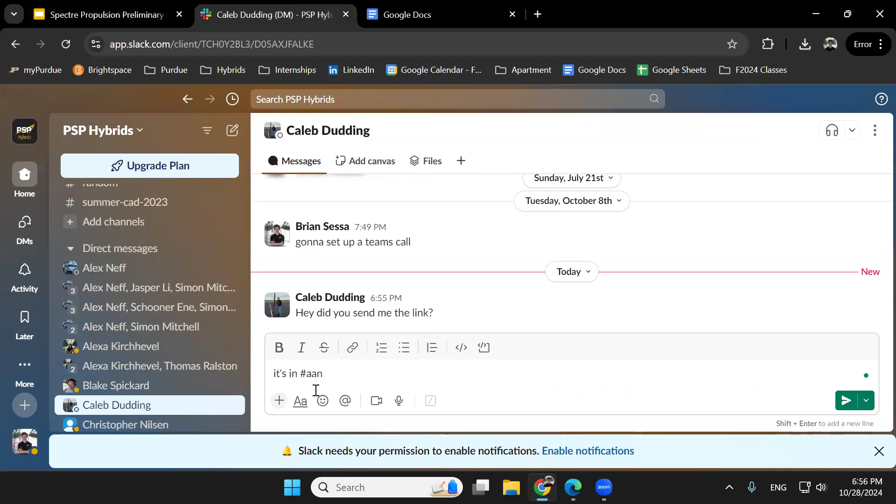At the post office when you mail it, actually go up and give it to them, because when they hand cancel it, it marks it with the date. So it'll be marked that you put it in the mail that day. Even if it's a few days after the election, they know you sent it. At least that's how it works for Alaska. I'm not sure.

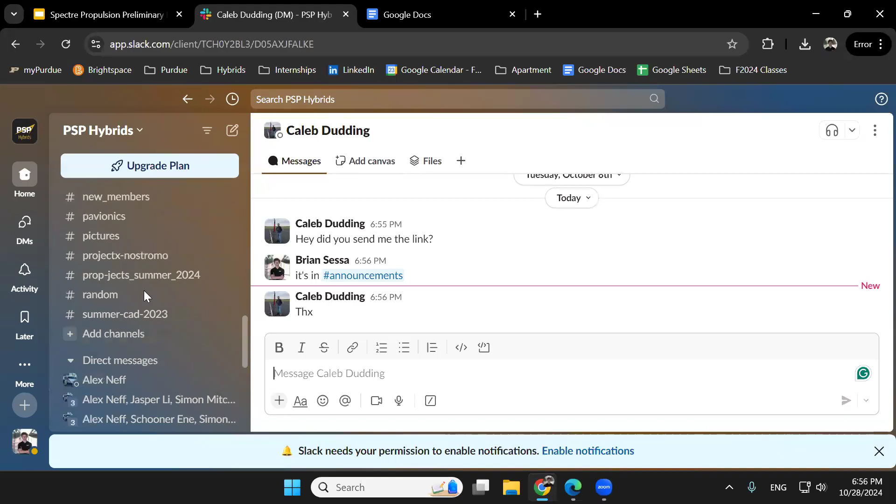Howdy, gents. Oh yes, tomorrow. He confirms your attendance.

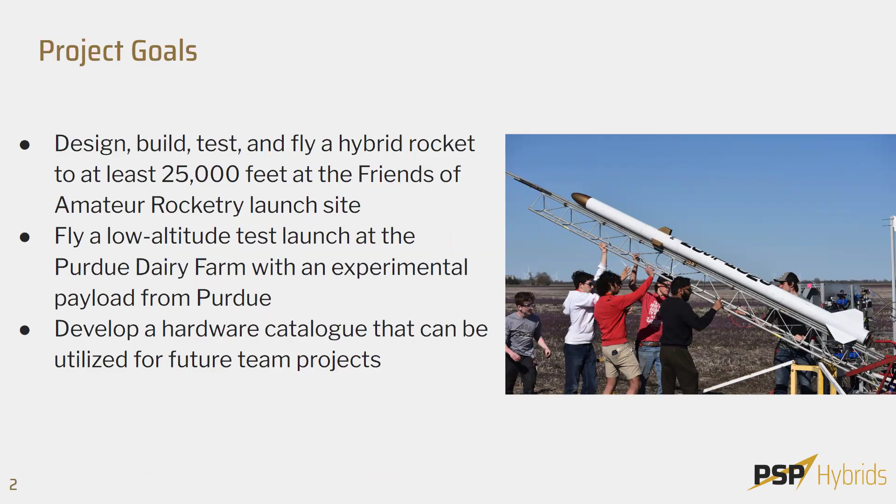So Spectre's project goals entail a rocket that we plan to fly to 25,000 feet at the Friends of Amateur Rocketry launch site. We plan to fly a low altitude test launch at the Purdue Dairy Farm sometime before the FAR launch. We would also like to develop a hardware catalog that we can use for future projects for the team.

Our propulsion system requirements: the engine will bring the rocket to at least 25,000 feet. We are shooting for between a 25,000 and 30,000 foot apogee. The engine will deliver no greater than 9,200 pound-seconds in order to comply with the FAA Class 2 rocket impulse limits. We will have a thrust-to-weight ratio of 10:1 upon takeoff, and the engine and its GSE will be capable of nominal safe operation at Zucrow, Purdue Dairy Farm, and the FAR launch site.

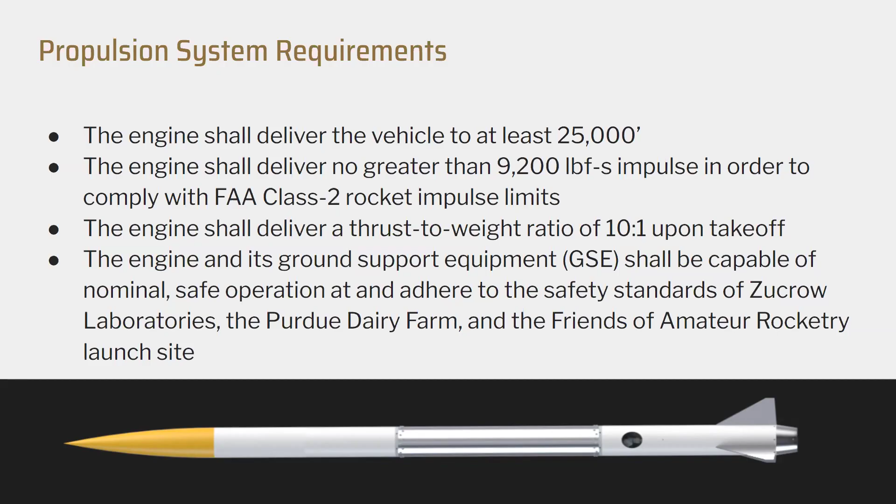Getting into the overview of the rocket: we've developed an O-class blowdown hybrid rocket engine using nitrous oxide and HTPB. We are supercharging our feed system to 1,000 PSI using helium. We estimate a 2,100 pound takeoff thrust with a 550 PSI startup chamber pressure. The rocket has an 8-inch outer diameter with a 6-inch combustion chamber. Any questions about our requirements or system overview?

Shrunk from the last time we talked, right? Total impulse - the total impulse shrunk, yes. So after talking with you, we decided that we wanted to stick below Class 3.

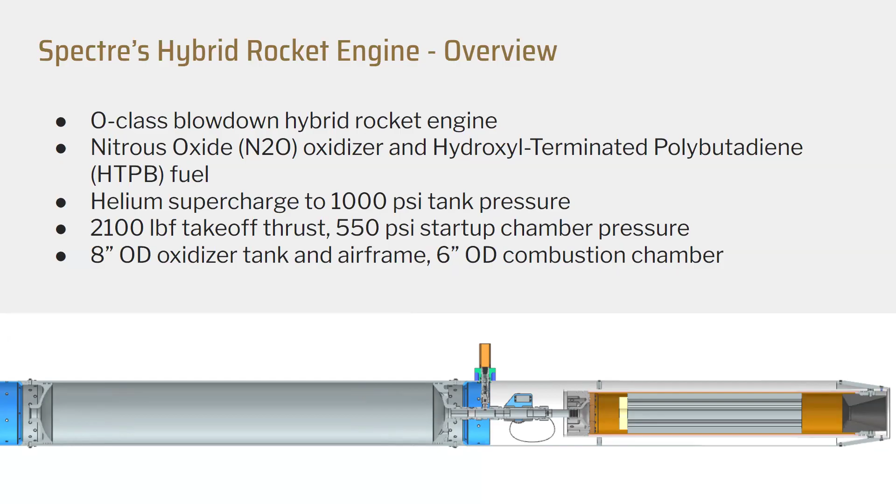Getting into our system simulation, we are predicted to have a 161 pound wet mass and a 116 pound dry mass to an apogee of 25,000 feet. The rocket is about 15 feet long in the current configuration. For the simulation, we have a MATLAB propulsion simulation that we imported the thrust curve into OpenRocket, along with the dry and wet masses. This is how we've run our OpenRocket.

Getting into our propulsion performance simulation. Hey Brian, quick question for you - can you go back to the previous slide? Okay, maybe you'll get to this later.

I might be jumping the gun a bit, but this type of simulation where we're looking at a Mach number of 1.4 goes a little bit beyond what OpenRocket is really built to simulate. I don't know if you've done other flight analysis, but I don't know how these numbers will look in real life, since OpenRocket's documentation notes it really struggles with trajectories that exceed Mach 1. That might be something to look into.

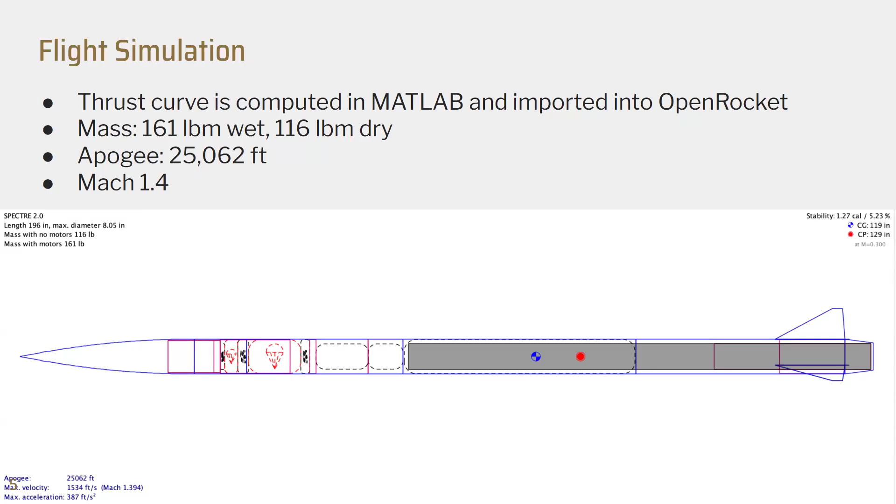Some of our propulsion simulations: we are starting with a takeoff thrust of 2,100 pounds with an average thrust of about 1,850. We're looking at a 4.5-second burn time. Our chamber pressure is an average of 488, and our tank MEOP is 1,000 psi with an average of 805 psi.

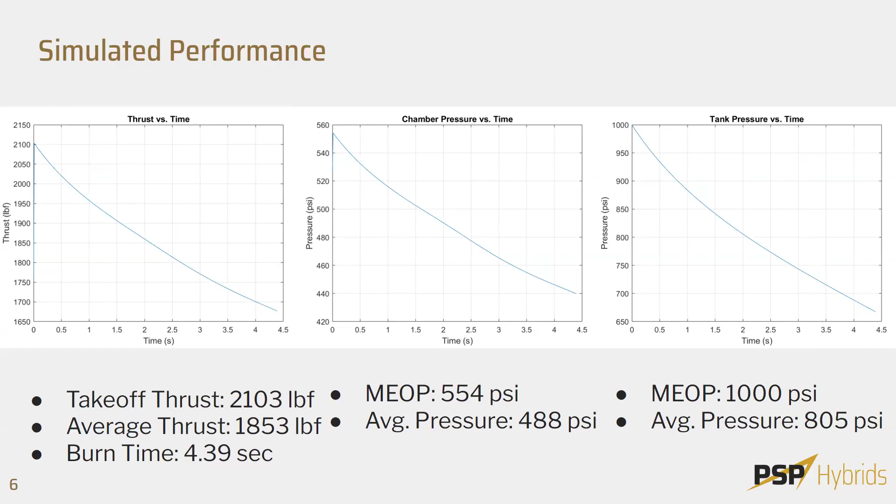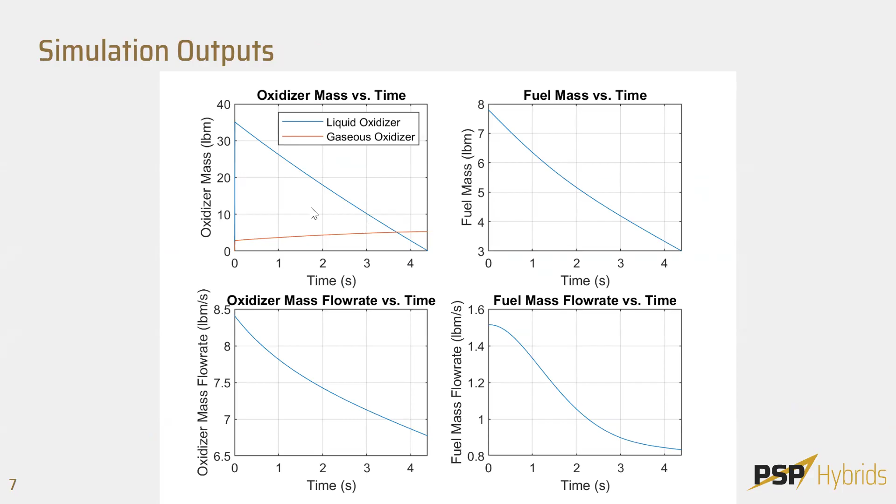We have some other simulation outputs from our propulsion simulation - our mass flow rates. We're starting with an oxidizer mass flow rate of 8.5 pounds per second, and a fuel mass flow rate of about 1.5 pounds per second. We also have other performance features, such as oxidizer-to-fuel ratio versus time and specific impulse versus time. We'll get into later, when we talk about our fuel grain geometry, how we've decided on this OF curve. But if you'd like to look at these as references, they're here in the slideshow, and I can always go back to them.

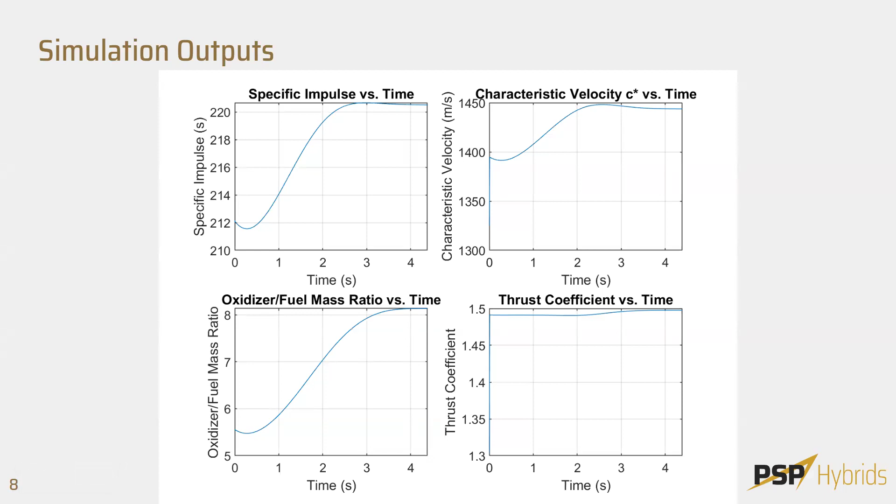Does anyone have questions about the top level assembly before we get into individual components? Okay, great.

I'm Safe, the engineer responsible for the injector. This is our injector. It's a cavitating Venturi style injector, essentially a shower head injector, but the holes are cavitating Venturis. The requirements are that it must be able to choke the flow of oxidizer at a range of operating conditions, and it must achieve an oxidizer mass flow rate of 8.4 pounds per second, which is a propulsion requirement.

You can see some of the specifications here, and on the coming slide we'll show the geometry of the orifices in greater depth.

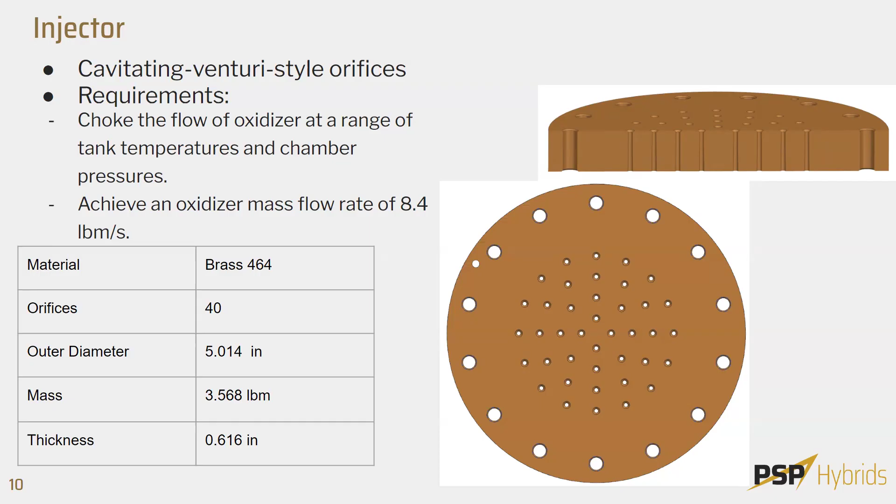This is what each orifice looks like. There are essentially two sections: the inlet and the diffuser. There's also the throat. The idea is that at the throat, the pressure drops to 55% of the nitrous vapor pressure, which we've determined is sufficient to cause cavitation, and in doing so, choke the flow and reduce feed-coupled combustion instabilities. The diffuser half angle seems like an arbitrary number, 0.6 degrees, but that's actually the diffuser half angle of a specific bit we found on McMaster.

So we're going to purchase a tapered drill bit and drill to a specific depth in order to manufacture this. To the right, you can see some CFD we performed to validate the performance. The color variation at the throat is indicative of an area of negative pressure, which is what we'd expect from our sizing. We expect the pressure at the throat to be much lower than the chamber pressure.

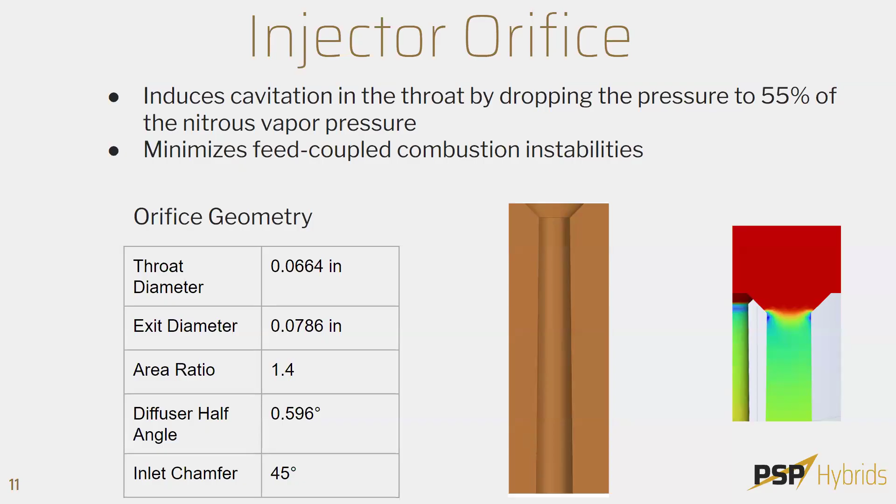This is the forward closure. What this does is lie at the top of the combustion chamber, right below the feed system, and it essentially mounts the injector plate from below. This is a bottom view, and you can sort of see the bolt holes that are going to mount the injector. From above, you can see the inlet that lies directly below the intertank plumbing or the feed system. On the sides, you see these counterbored holes which connect to the combustion chamber, the top part of the combustion chamber.

It also contains O-ring seals. These grooves on the sides seal against the combustion chamber, and you can look at the bottom view as well and see the face seal that seals against the injector plate. There are also two ports for pressure transducers: a pre-injector pressure transducer port, and a combustion chamber pressure transducer port on the side there. You also see a table with specifications.

Have you guys thought about how you're going to tighten your pre-injector pressure port? Yes, so we understand there might be a packaging issue with that port. We would either extend it once we've selected what pressure transducer we're going to use, or put a fitting stack up there. How would you do it without a fitting stack? I don't think you would do it without a fitting stack. If you're going to put a straight thread in there, getting it wrenched down there is going to be pretty cumbersome.

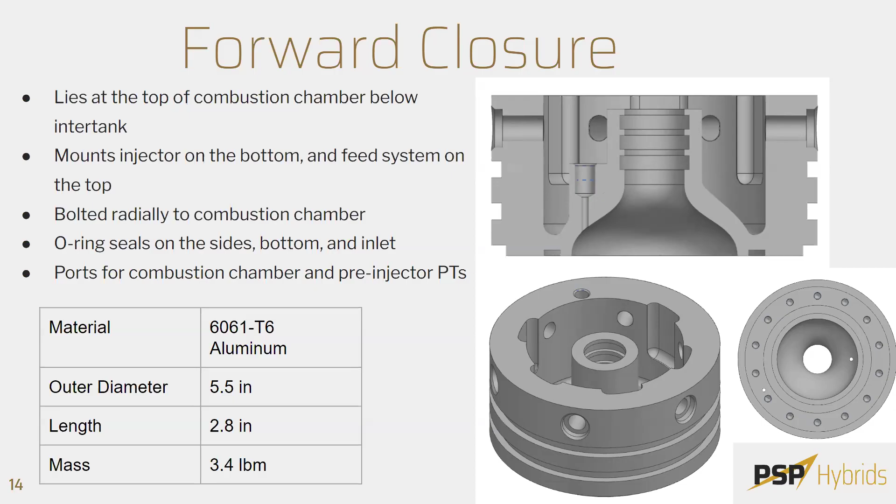So getting into our fuel grain geometry, we are going to be using a 5-petal flower geometry. The purpose of doing this is to boost our fuel mass flow rates towards the beginning of the burn by increasing the internal surface area of the fuel grain. I'll show this on the next slide, but from the analysis we've done, this geometry of fuel grain is going to lower our OF ratio towards the optimum OF for the same length that a cylinder would at a longer length.

The current geometry is 21.3 inches long, and we're predicting to have about 6 millimeters of fuel left after our liquid phase nitrous burn ends. This is to protect the rest of the liner and the wall of the combustion chamber and help with our thermal management.

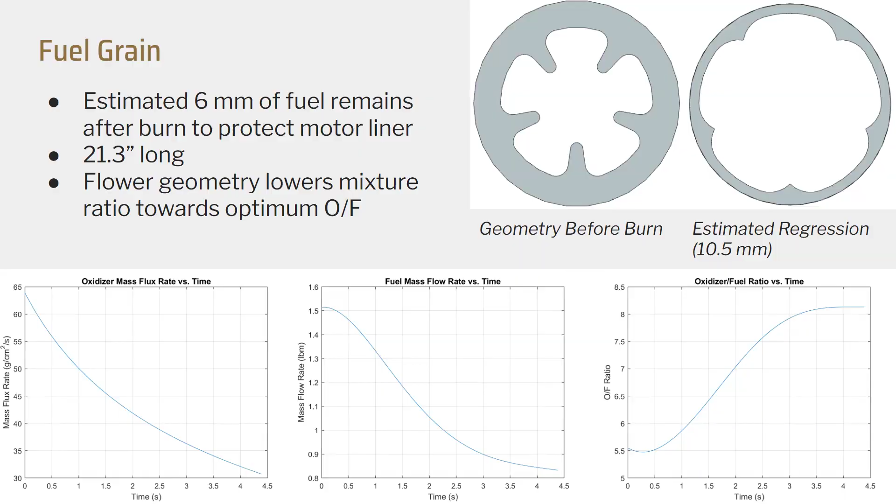This is some of the analysis that I mentioned going into the port geometry comparisons. So these are two fuel grains with the same port area and the same length, but one of them is a cylinder fuel grain and the other is the flower fuel grain I showed on the last slide. Here you can see our average OF ratio for the cylindrical fuel grain is a lot higher than the average OF of the flower grain. So we have chosen the flower grain in order to sink our OF ratios towards the beginning of the burn and have the average sit closer to our optimum mixture ratio.

Do you have a calculation of your port? No, I don't have one for the port Mach number. Port velocity? No, I don't. I will make note of that.

How have you vetted this geometry against prior art? Your own prior art or others? So Hybrid's past two vehicles, Havoc used a cylindrical paraffin grain, and Nostromo used a star grain similar to the flower grain similar to this one. The flower grain saw decent performance compared to the cylindrical grain. It was hard to do because of the limited hot fire testing we did on Nostromo, so it was hard to directly compare how the geometry was affecting the mixture ratios. But we saw pretty stable burning in both the flower and the cylindrical ports.

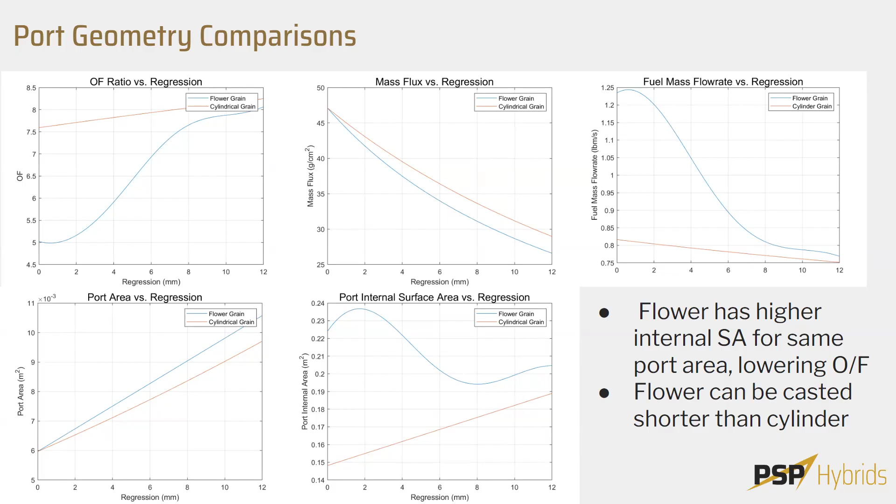Okay, we're going to hop into fuel grain casting, Schooner.

HTPB-45M is what we currently have stocked, and it's one of the higher density HTPB variations.

We went with MDI due to its characterization to cure at room temperature, so it doesn't require an oven to bake. For the fuel to curative ratio, we did calculations based on the effective weight of the OH molecules to the NCO molecules in the curative.

We came up with a 4.9 ratio of fuel to curative. We also decided to add a little bit of additives so we don't have radiative heat transfer from the burning surface to the internal parts of the grain, so we don't have melting before the flame actually reaches the HTPB.

For actual casting, we used a standard single long grain with a casting rod, with end caps on each end to keep the casting rod concentric in the liner. To ensure there's no adhesion to the core rod, we're going to wrap it with plastic wrap, which has been shown in solid fuels that also use HTPB as a binder to reduce adhesion. It's also made out of PVA, so in case we're unable to remove it, it's water soluble.

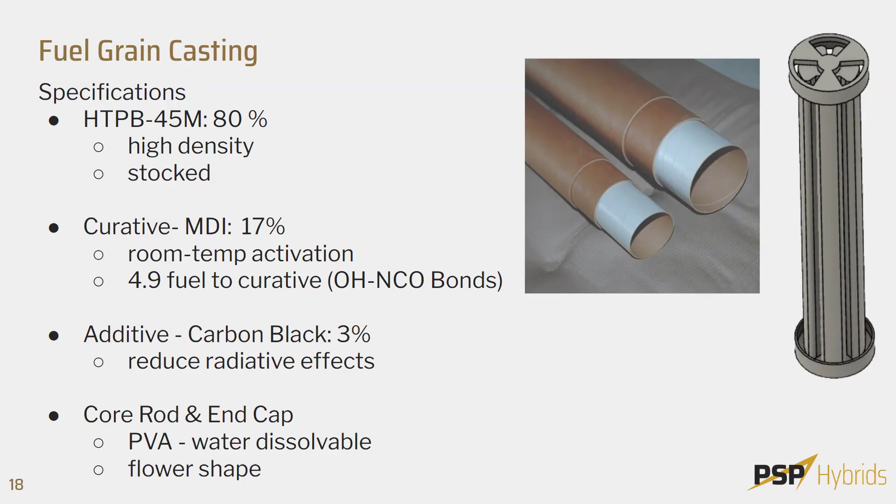I think that's it. Miles.

Are you going to try to use force to push it out, or are you just gonna use water? I think we're gonna use water, and then the plastic wrap would be for if there's anything that's not coming out or not dissolving, then it would be able to slip through the plastic wrap and be removed that way.

So are you gonna discard the cardboard tube? No, it'll be cast into the cardboard tube and it'll sit in the combustion chamber. Right, so how do you protect the cardboard tube when you're using all this water to get the mandrel out? It's a good question.

Yeah, so Brian, when we did this, the phenolic itself protected the liner because phenolic's pretty waterproof. Your normal cardboard won't have that effect, it'll dissolve. Right, so yeah, we'll have to reconsider that then.

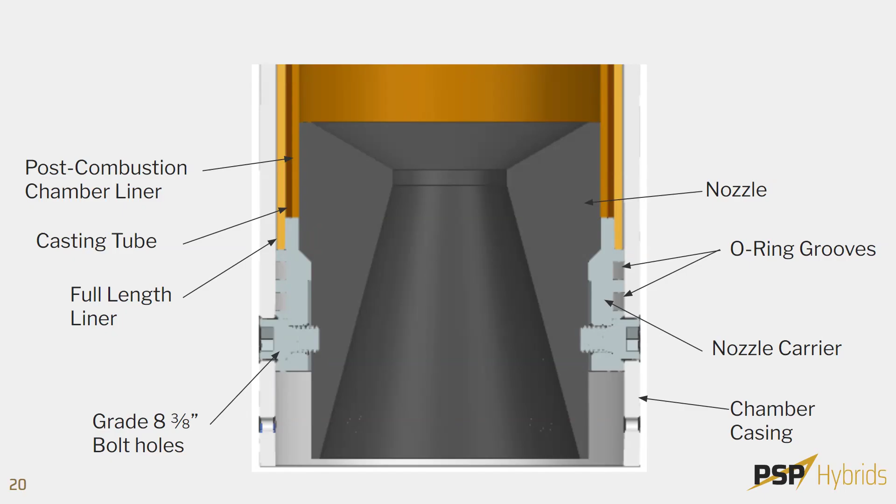It also sits on top of, I'll pull this up for clarity, the nestled phenolic piece, but that's going to be right in the hottest region in your nozzle. Right, but yeah, you are right, if that casting tube gets compromised, then you're going to risk the stability of the fuel grain inside the combustion chamber.

It would be better to cast your fuel grain directly into the primary phenolic and then nest those other pieces up into it somehow afterward. Right, I think that's what we will do. We could just make the casting tube not full length, just the same length as the post and pre sections, and cast the fuel grain to a larger diameter. Appreciate the comment, so you'll use the cardboard just in the post and pre. Yeah, we can do that, that makes sense.

Jim, did you have a question? Okay, cool.

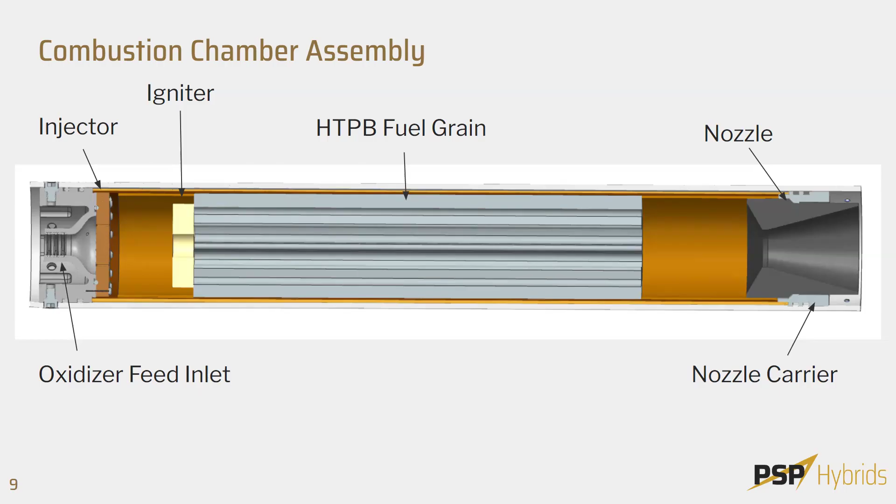Could you go to that slide? That slide is perfect right there. Okay, correct me if I'm wrong, but I believe there's a leak path between the graphite nozzle and then through the 3/8 inch bolt, right?

Oh, sure, you know what I mean. Can you see my mouse? Yeah, okay. So we plan to have RTV silicone here in the carrier and on the liner. This is to act as the sealant. So if this region where my mouse is doesn't act as a leak path, then this shouldn't either, is the idea. I got you.

Why are you gluing it to the phenolic? You're going to glue the nozzle to the phenolic? Or sorry, the RTV will be on the carrier, not the phenolic. Okay, the carrier assembly. Are you worried about pressurizing the phenolic, Caleb?

Just the phenolics, it's card. I'm worried it'll flex and the RTV won't hold up to that. And then you would also make your assembly non-disassemblable, and you would create a unified assembly of the two, which you really don't want for practicality's sake.

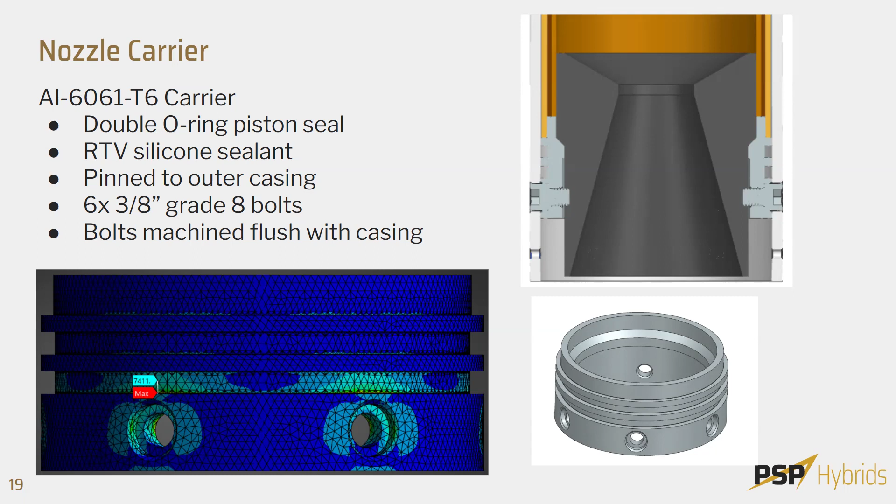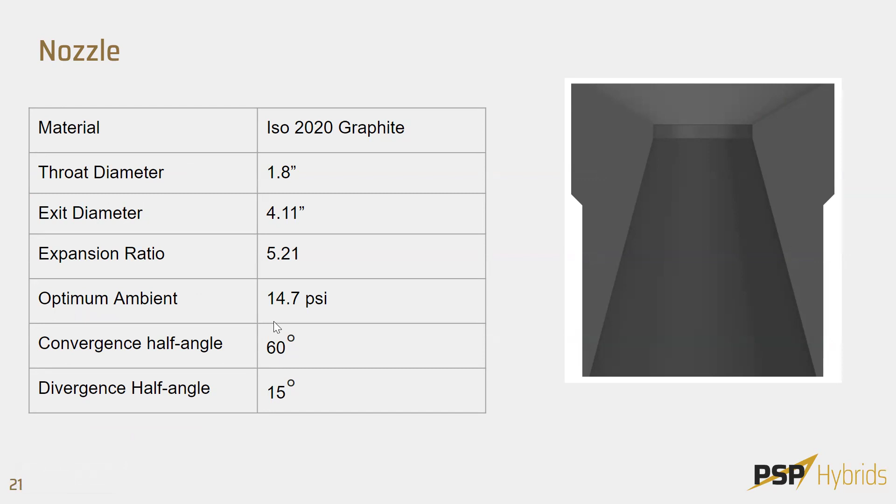And yeah, there's the assembly, and an overview of our nozzle. We're making the nozzle out of ISO 2020 graphite, machined by Caleb. Thank you, Caleb. We're sitting at a 5.21 expansion ratio with an optimized ambient pressure of 14.7 psi, so we're going to be operating perfectly expanded upon launch. So we're going to go into our igniter if there's no more questions about the nozzle or the nozzle carrier assembly.

All right, hello everybody. My name is Simon. I'm one of the co-leads for the propulsion team, and I'll be presenting the igniter. So the igniter consists of two parts.

We have a solid propellant core, and then a paraffin wax outer ring around that that'll bridge between the solid core and the inner diameter of the phenolic in the combustion chamber. We'll also add a little bit of magnesium shavings into that paraffin wax outer ring just for additional thermal energy for the ignition. We'll use an E-match pyrogen to actually trigger the igniter.

Our plan for that solid propellant core is to use the Purdue propellant formulation, casting in coordination with the Spaceport PSP team. If that falls through, we're also looking into partnering with somebody who has an L3 rocketry license, and we will consider using a commercial grain as well for that.

This is essentially the same design that was used in the past on the team for the Nostromo launch, scaled up slightly to accommodate the larger motor size. It has around 1.5 times the solid propellant mass as the Nostromo igniter did.

Which rocket was the Nostromo? It's the senior design rocket. Okay, it tested last spring. Yes, that flew in April. We started testing the spring, like January, February, and launched in April. Okay. And we saw great success with the igniter, and so we don't see a reason to use an alternative.

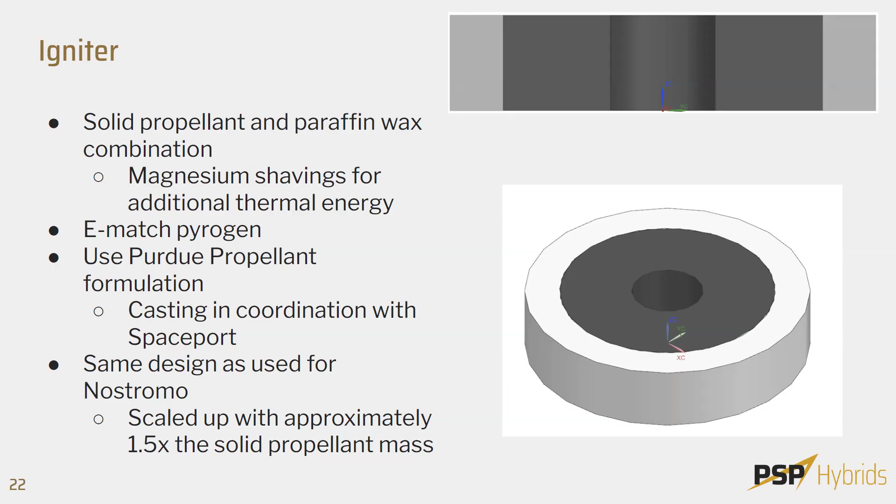I'll now discuss the flight tank that we're planning to use. You can see some of our top level parameters there. We're looking at around 2,100 cubic inches of volume. We have a maximum allowable working pressure of 1,200 psi, planning to hydrostatic to 1.5, which is 1,800 psi. The system was built with a safety factor of 2.0, which brings us in line with the Spaceport America Cup design guidelines. The entire system will be constructed out of aluminum.

It has an 8-inch OD. Primary wall thickness along the length of it is 1/4 inch. It's around 55 inches long and weighs a little over 40 pounds. We're planning to have a 1-inch SAE ORB port on each of the head caps, and then on the aft head cap, we'll also have 2 auxiliary 1/4 inch SAE ORB ports that we're planning to use for instrumentation.

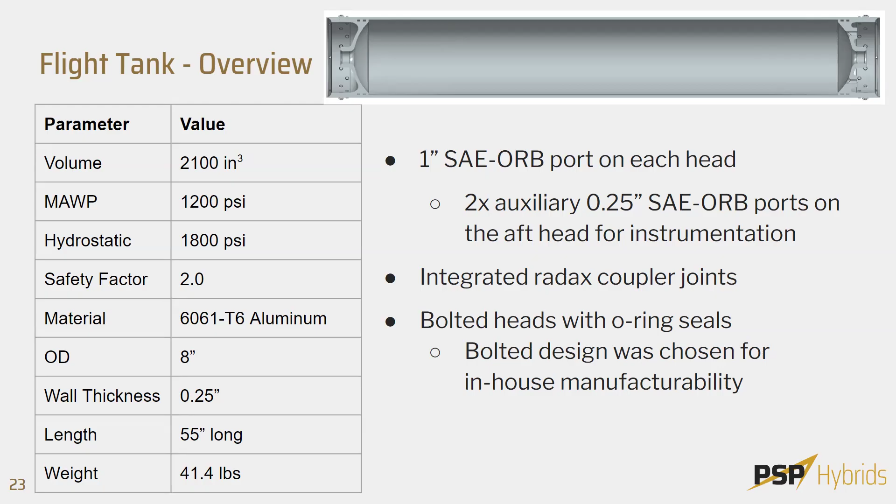Primarily, we'll add a thermocouple there to make sure that we're getting temperature of the liquid phase of the nitrous oxide. Also integrated into the head caps are Radax coupler joints, which we'll discuss a little bit later on in the presentation. And then the head caps will be secured with a bolted closure, and then we have O-rings for the seal. We'll discuss a little bit more of that in detail.

The factor of safety of 2, is that on yield or ultimate? That is on yield. And I'll discuss where that is derived as well.

Here's the design of the tank head itself. It's bolted with an O-ring seal. We're planning to use 2 redundant -365 90A durometer nitrile O-rings, and we'll run contoured backup rings on those for a little bit of extra support.

We're going to use 3/8-24 button head screws, arranged in 2 rows of 10. The actual head geometry is torispherical. Our goal with this geometry was to minimize weight and length, to reduce the amount of stock required to machine it from.

FEA analysis shows a safety factor of 2.09 on the head with the auxiliary ports. On the head without ports, the forward head, it's a little higher. The structural analysis for the bolts and wall stresses are seen here. Our primary failure mode will be tear out of the bolts on the head caps. You can also see the stresses in the primary wall of the tube, the lowest being our hoop stress at 2.15 factor of safety.

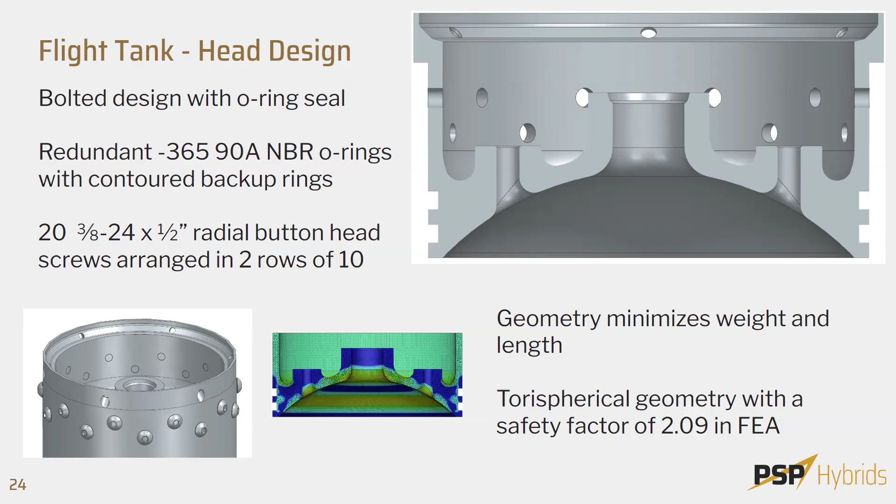What are the angled holes for? Is that an airframe thing? That is for the coupler design, which we'll discuss in detail later on. Okay, so it couples to the airframe.

And then the forward tank instrumentation manifold, you'll start us off with that. So the design requirements for the forward tank instrument manifold were to withstand the pressures of the flight tank, as well as allow 2 relief valves and 2 pieces of instrumentation access to the pressure within the tank during flight and during filling. So we decided to go with a hexagonal shape to fit within the 8-inch diameter profile, while also allowing our valves and instruments to be offset by 120 degrees to make it easier to wrench these parts in during assembly.

The actual ports for the instruments and the relief valves are 1/4-inch NPT holes. They're on the side and on the top. The top hole is basically for the thermocouple to go directly into the tank and measure the temperature of the ullage of the nitrous oxide. The bottom port is an SAE ORB to match the same port as that on the upper forward closure of the tank. The failure mode for this piece of hardware is the tear of the threads on the actual ports.

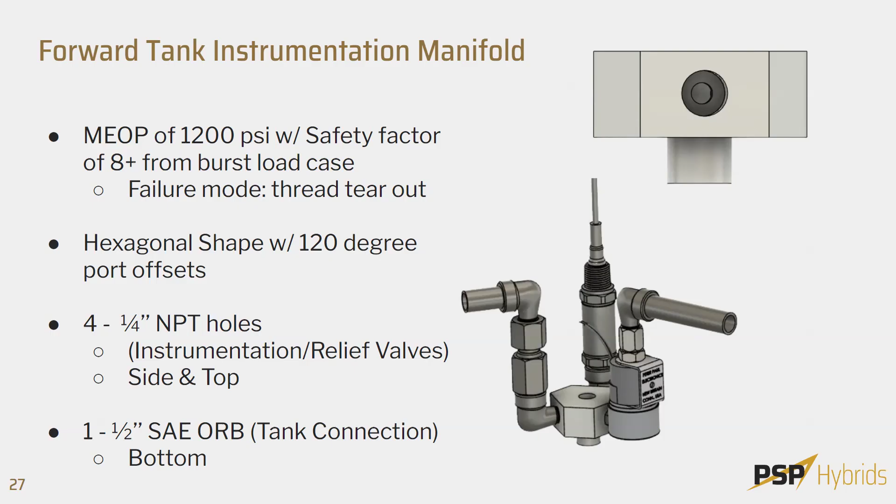It's also always interesting to screw stainless steel NPT fittings into aluminum. Right, you get to do that once. That was one reason we decided to create a separate manifold rather than multi-porting our nox tank head, because if we ruin that part, it's gonna be a lot cheaper to replace. But yeah, ideally we'll have to just practice on that.

Well, if you do, you can always use straight thread O-ring fittings, that elbow. You can make and break those as many times as you want. It's the NPT with the tapered threads that you're essentially gonna be machining your aluminum with the stainless fitting every time.

Yeah, any other questions? Okay.

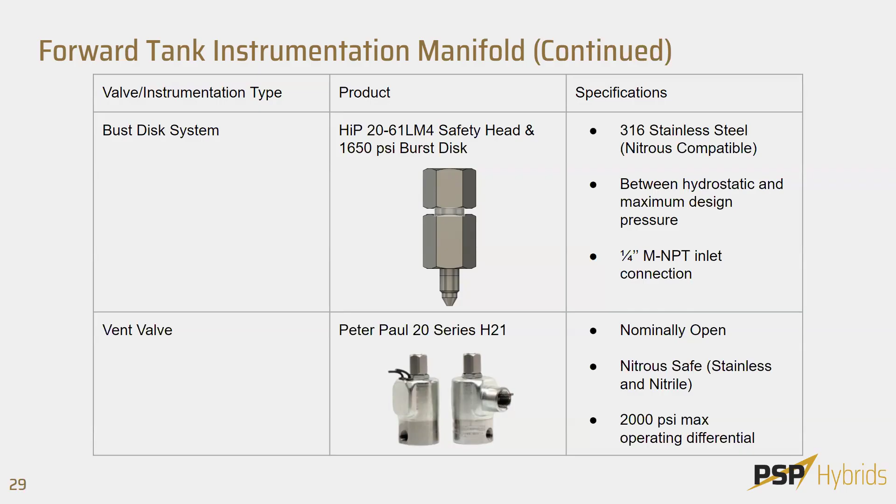It's been developed so that we have full control with the GSE before the launch occurs, so there will be no delay in controlling the vent valve. Only when the electrical disconnect on the rocket actuates will there be an adjustable variable resistor time delay that keeps the vent valve powered for a set period before it shuts off and the vent valve opens again, so there will be no situation in which the vent valve is stuck closed. To provide power to the vent valve during that short period, we'll have 3 14500 commercial lithium ion batteries. We estimate those will weigh about a quarter pound, so not a very significant weight.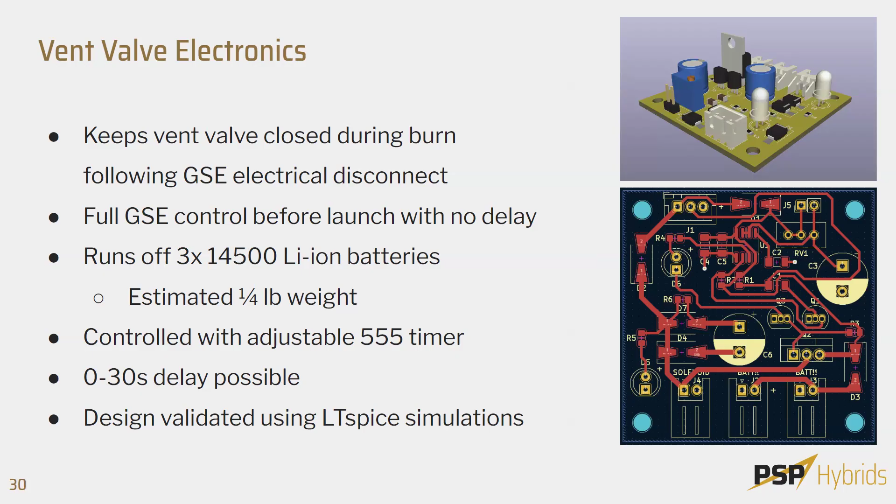Hello everyone, my name is Alex. I'm the propulsion co-lead along with Simon and responsible for the intertank. So just some general things about the intertank.

As you can see here, we're including a hatch in the lower airframe piece in order to read the valve state while testing our run valve. For our fitting stack-up, we're mainly going to be using anodized aluminum fittings from a source we have online, to reduce weight and things like that.

So we're going to start off with the run valve team. Do you guys want to come up? Yep.

Hi, I'm Theo. And I'm Kiwano. We are two of the members on the Run Valve Team new member project.

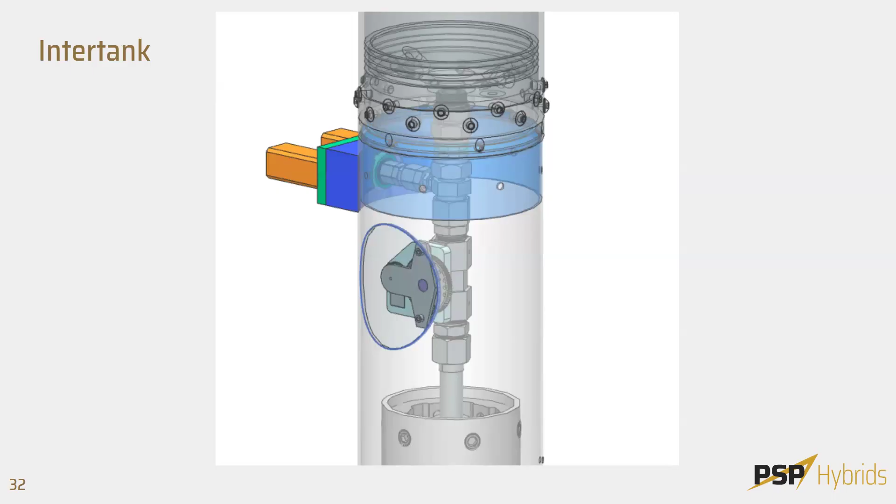We were tasked to design a mechanically actuated onboard run valve. It needs to actuate in 300 milliseconds or less to fully open the valve in time. The valve needs to open 90 degrees, and we're using a 2-to-1 gear ratio, so our servo needs to actuate 180 degrees in 300 milliseconds.

We were planning on using a magnetic disconnect, but we are now discussing maybe using a mechanical disconnect instead. We're still figuring that out. They used a mechanical disconnect last year, which would probably work for our needs, but we need to do some more research on a better solution.

Looking at servos online, we ran into an issue trying to get enough torque but also enough speed on our motor. We found a motor that meets our torque needs and is relatively close to our speed needs, so we're going to purchase it, do some testing, and attempt to overvolt it to get faster actuation times.

There's some concern, though, depending on whether the motor has a built-in microcontroller, because that can be damaged by overvolting. We're not sure based on the listings online, so we need to do some more looking once we actually get the part in our hands.

About the ball valve, we found one online from a manufacturer called Durachoice. It's made out of stainless steel, 2000 psi rated, nitrous compatible PTFE, and is 0.98 inches in diameter.

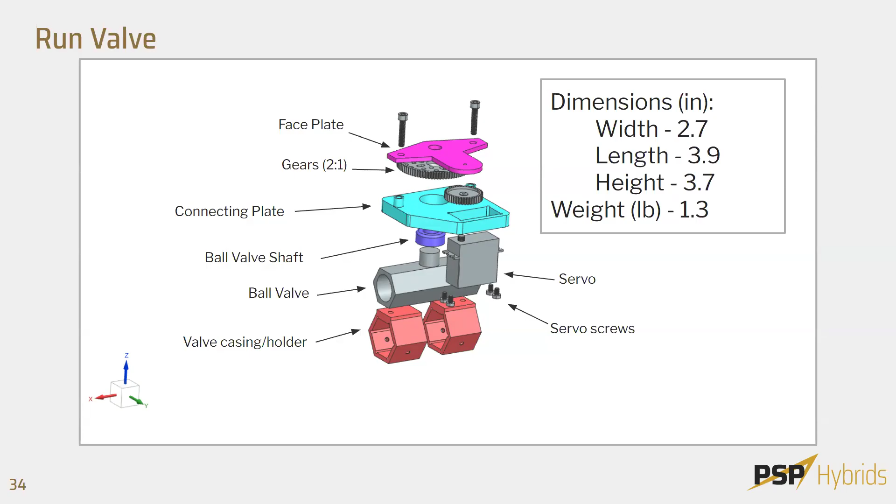We plan on making our ID, we're aiming for 1-inch throughout the intertank. So I think it's a 1-inch nominal, but it's got 0.98 inch ID. It's got 1-inch NPTs on the side of it. A 1-inch valve will have like a 1.3 inch OD, 1-inch tubing is like 1.3 inch OD.

This may be a half-inch valve. From the chart on their data sheet, it listed like a nominal value and then an ID for it. It said 1 inch and 0.98 inch. I may be misremembering, but we'll definitely look into it and make sure. Do you have CAD for it? No, we do not have the exact CAD, they emailed the vendor. So is the ID the ball ID or the connection size? I'm pretty sure it's the ball ID.

So it would be good to put on here what is it, a 1 inch NPT valve, a 3/4 inch NPT valve, etc. And then the valves are typically characterized by whether it's a standard port or a full port.

Are there ball valves out there with more friendly external geometry? I'm not sure. We did a lot of research, but I think this was the best and most affordable we could find. The problem we're running into is that all the ball valves that had a good shape to be paired with a motor already had a motor attached to them that was much more expensive, so we were trying to save some money by designing our own system. Is high pressure systems selling ones that are NPT fittings? Not sure. I know you can just buy the high pressure systems ball valves without the massive pneumatic actuator attachment, and those are pretty friendly to mount too. But they're gonna weigh 5 times what a low pressure valve weighs.

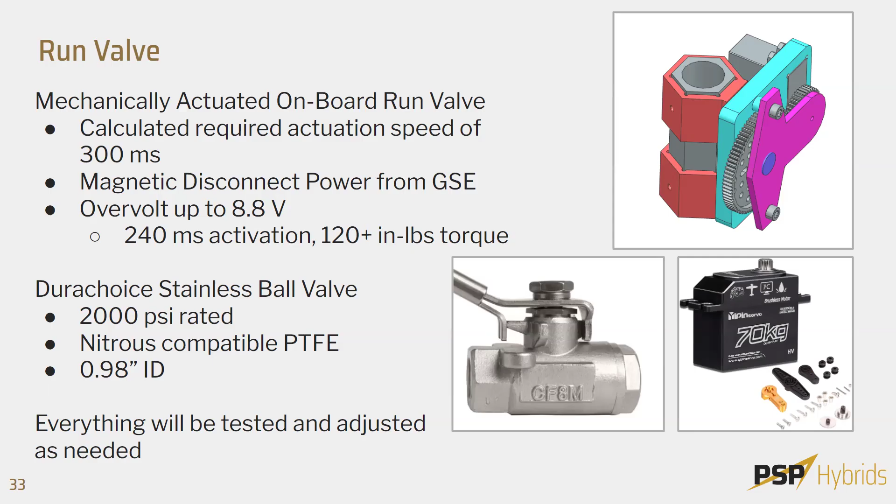So next thing we're gonna talk about is the quick disconnect. This is connected at a T just above the run line, just below the aux tank. It is a design that's been proven before at a smaller scale on Stromo. We currently own the 1/4 inch helium rated run line hose that will go into it. And it works basically just by using a McMaster stainless steel high pressure quick disconnect coupling and pulling that back while pushing itself off the rocket. It'll most likely be connected to the test stand / launch rail by some sort of system that will make it so it doesn't hit the ground. And those 2 orange actuators you see, we also currently own our 60mm stroke pneumatic cylinders.

So the QD will have integral check valves? Yes, it is, check valve inside of it.

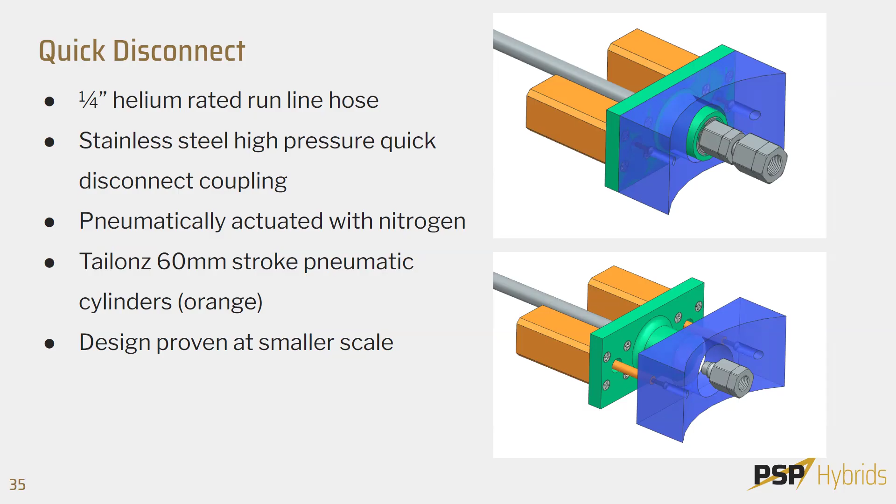Okay, that makes sense, so make it like a little gap there. Air gap it, yeah. Cool.

As opposed to that very proven system, this is more of a novel system. This is our feed system interface, so this is what connects below the run valve into the top of the upper closure, the forward closure of the combustion chamber. You can see here, it's kind of a narrow view, but there's a wider view.

The next slide shows the requirements for this, which were to unconstrain the intertank length from the length between the holes in the lower airframe. That's a little confusing to imagine, but all of our thrust is guided through the lower airframe piece that's connected at the lower part to the combustion chamber and at its upper part to the bottom of the aux tank.

So that length basically constrains the length of the intertank very specifically, and it's unknown to a very high precision what that length is going to be. So we need to be able to, during assembly, have a somewhat adjustable system. We don't predict it'll have to adjust very much, but it does need to. So we decided on the system of a rod seal with this

1-inch OD, 0.049 wall stainless steel pipe that's flared into an AN fitting that fits into our upper closure or forward closure. There in black, you can see our X-profile O-rings, and the white are backing rings for those O-rings to ensure the seal is good.

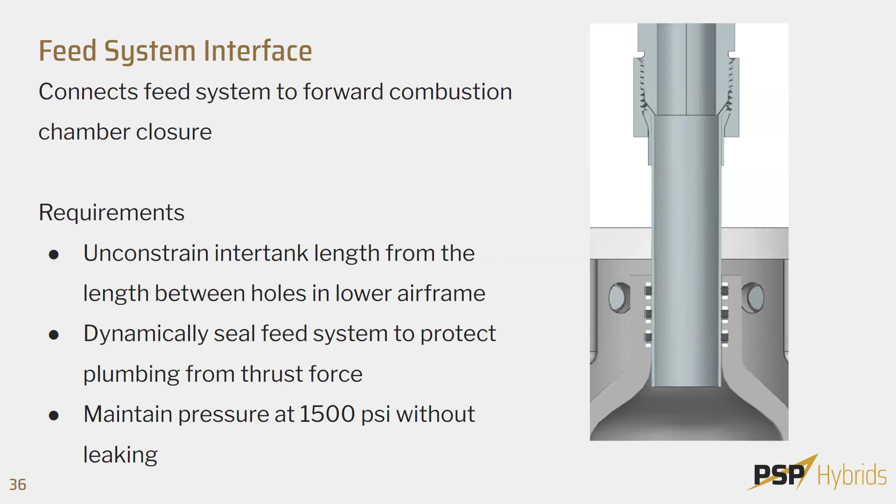Here's a wider view, and also a view of our demonstrator piece. Because this is a novel idea, we wanted to make sure it worked, so we hydrostatic tested a piece similar enough to prove the design. We hydrostatic tested this piece to 1500 psi at Zucrow, and it passed with flying colors on the leak down test.

You can see it a bit more here. The main difference between the two setups is that this demonstrator is aluminum, while the actual one will be stainless steel, but we don't believe the surface finish will be significantly different enough to challenge the O-ring seals.

The main reason we chose X-profile O-rings instead of classic O-rings is that they have better characteristics for sealing dynamic interfaces meant to slide during install and uninstall, since they have two points of contact. They're also less susceptible to spiral failure when taking them in and out, and they can accommodate a bit of Krytox lubricant in the gap between the two X's. That's why we decided on those for the dynamic seal.

Any questions on this system or the test piece?

I hate it, but it's kind of clever. We'll take that.

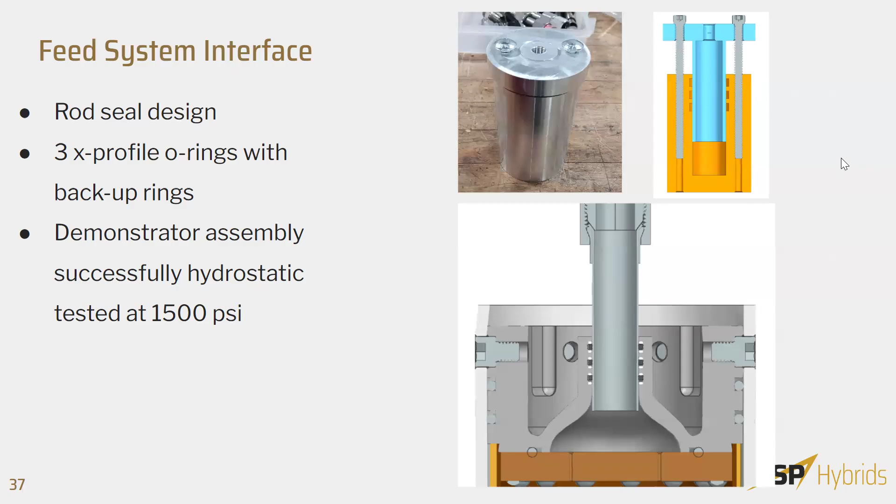And in the rocket, what keeps these parts together? Do you mind? How do I show a hidden slide? You have to escape. I have a hidden slide in case we had questions about this. How do I do slideshow?

Basically, the lower airframe piece, the gray on the outside, connects to that blue coupler on top. The orange is our constrained length, and that constrains the blue length very specifically. So what's keeping it from coming apart is the connection between the airframe and aux tank, and the airframe and combustion chamber.

So this connection and this connection, it's the stack up of fittings in the valve itself, screwed into the aux tank. If you take the airframe away, the motor will just fall on the ground. It's not constrained to the fittings, so you're relying on the airframe, but the airframe is sized to handle the parachute deployment forces, those shock forces, so it should be more than enough to handle the pressure forces that this one faces. We can calculate that force and make sure of that in our further analysis.

I don't think there's any calculating parachute deployment forces, but a lot is the answer. Okay, just make sure your airframe is good because you're relying on it. Yep.

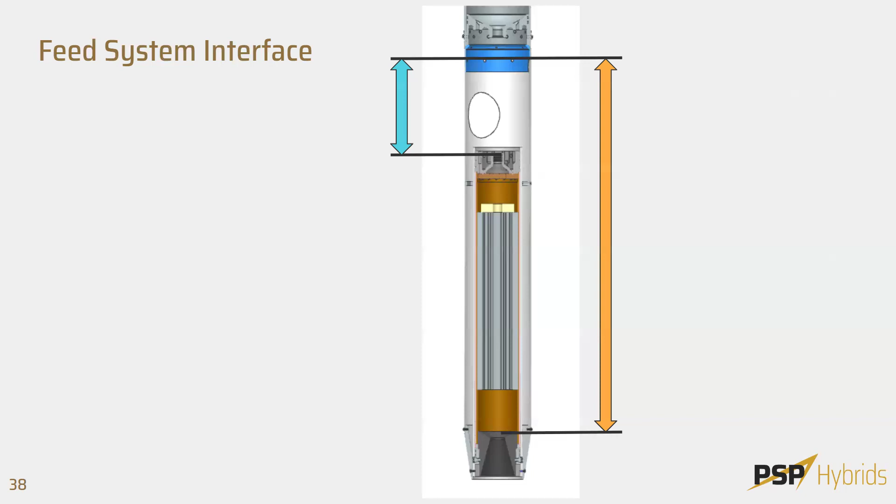Moving on, just a little bit on electrical disconnects. It's something we've been thinking about because it's flight hardware, so it's more in the distance than the hot fire test stuff. We selected USB 3.0 connectors because Nostromo used USB-Cs, and USB-Cs are not polarized, so it was possible to plug them in backwards, which would reverse the power and possibly fry components.

So they're pretty well, pretty strongly connected, but not too strong. We think the force of launch won't be able to disconnect them. We could theoretically manufacture little 3D printed pieces that glue onto the side of the airframe with a square hole at the end, and we can play with that angle. Right now I think it's 45 degrees, just to make sure it tears out cleanly. So, any questions about this?

USB 3 is basically just like a USB-A connector, a regular USB with the blue strip, that's the 3.0. It has more conductors to support faster transfer speeds. So using USB 3.0 type A connectors over 2.0 type A connectors gives us additional conductors for instrumentation valves. I'm trying to find a reason to hate this, but I think it's actually really clever.

We'll take it, good luck. Thank you, I hope it's plugged in better than my USB port in my car. Yeah, we may have to decide to buy them from a good manufacturer that makes a snug connection. Hey Simon, if you're gonna use pre-made cables before you get to installing them, cut them first to make sure they're not some weird wire that's impossible to solder to.

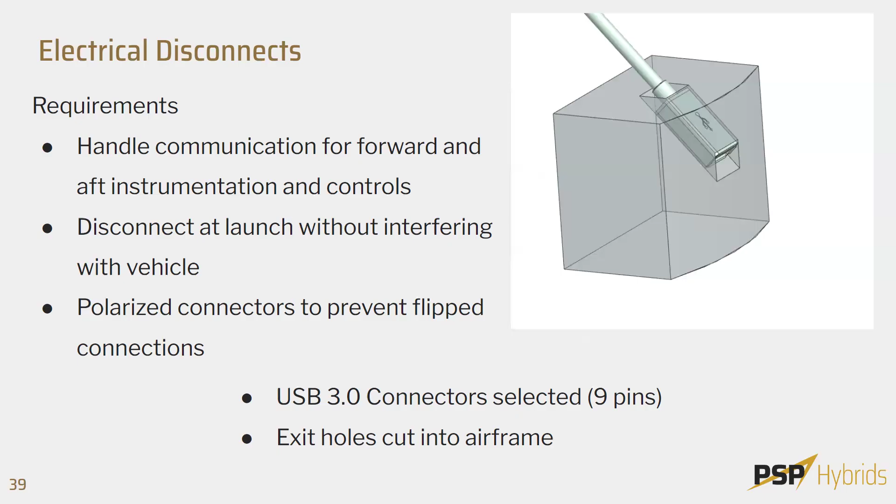Cool, all right, next we're going to get into the airframe integration. Hugo.

Hi, I'm Hugo, the manufacturing specialist and also the engineer responsible for the coupler design that will join the oxidizer tank to the upper and lower airframe. It's a Radax joint design with 45-degree angle bolts relative to the vertical. They're usually 30, we went with 45 mainly because of packing issues, so the bolts stick out less. Designed to work at 5,000 psi, 5,000 pound force. We are predicting our biggest force to be parachute deployment, but it's still up to debate.

Our parachute deployment force isn't finalized entirely, which is why we decided to go with a very big number of 5,000 pounds and a factor of safety of 2 on top of that. One of the other reasons we decided to go with this number is just because of future proofing.

As the manufacturing specialist, I don't want to make these pieces twice. Giving them a higher safety rating would mean if something changes in our system architecture, we can most likely reuse them. Also, the main cause for failure in our last rocket, Nostromo, was recovery.

So not this particular component, but we are trying to prevent that from happening again. Oversizing this component specifically, which is mostly just increasing the number of bolts and pins to different elements, isn't very difficult. As you can see, it's made of 6061 T6 aluminum. It has 6 bolts that pull into both closures for a tank, and then 7 pins that go through the airframe.

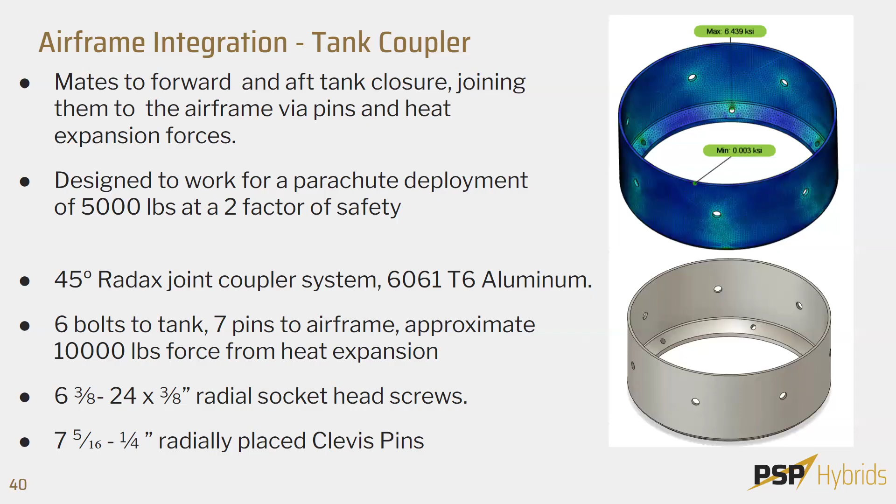Once it is fully assembled, we will drill the 7 pinholes through both materials at once and then insert the clevis pins through them. This is a view of the actual assembly with the Radax coupler, then the tank wall closure, and airframe. And that is some of our points of failure.

For the bolts, it's mainly through tear out, and then the pins bearing of aluminum. We didn't really calculate forces through the airframe just because of how hard those calculations proved to be. We've talked to some professors about the subject, and for now we believe the very big factor of safety, along with the general extra force that the heat expansion will give us, should prove sufficient to hold the entire system together.

And this will be mirrored exactly almost in the aft closure. Now, any questions?

In the upper, what does the green represent? Airframe. And is there actually a gap between your coupler and the airframe? No, the coupler is the white, the airframe is the green.

They physically interact with each other. Gotcha. We're gonna chill that way, and then put it into the airframe.

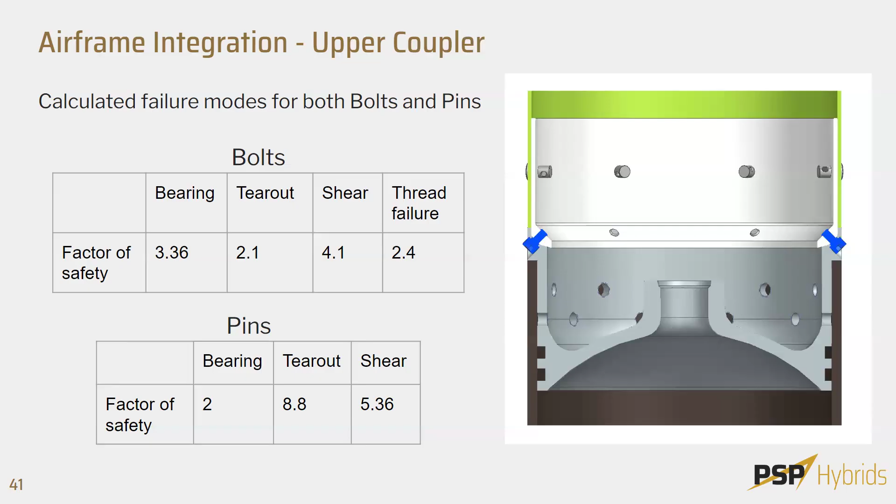Hello, everyone. I'm Jasper, the lead from Airframe. I'm going to talk a little bit about how our airframe interacts with propulsion.

The see-through part is going to be a 4-foot length of G12 fiberglass tube. At the top, we have the coupler that Hugo just presented, and then there's a hatch cut out so that propulsion can access intertank plumbing. We plan to 3D print a hatch cover for it, similar to how it was done on Nostromo.

Going down a bit, there's a thin motor centering ring we plan to machine out of aluminum. It just functions to hold the motor centered, bolts into the airframe, and doesn't carry any load.

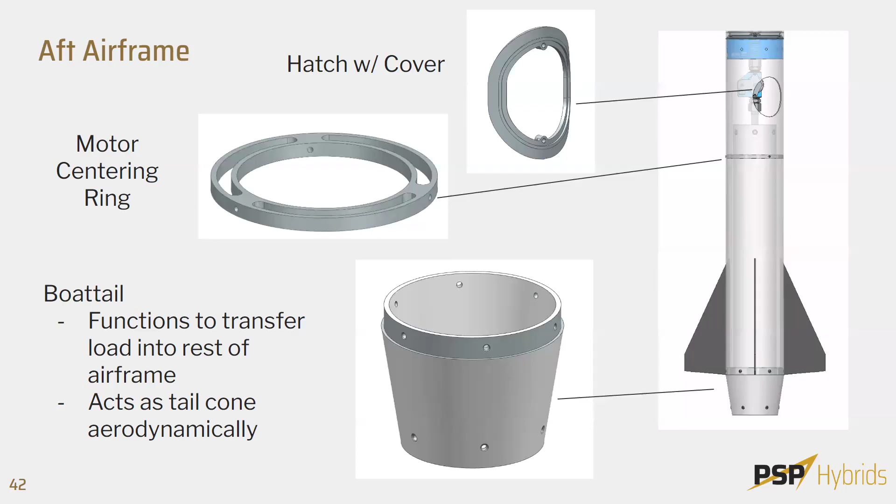Going down to the bottom is our boat tail, and this is basically our thrust ring. It's bolted to the combustion chamber via the bolts at the bottom, and the airframe sits on the lip that's on the boat tail.

Here's a little bit more detail on the boat tail. We selected aluminum 6061 likely, and we're just going to use the same stock as the ox tank. As mentioned, we have 6 bolts currently bolting into the combustion chamber. We've judged that that's strong enough to handle maximum thrust, that it won't shear through. It sits on the airframe, and we plan to also use bolts to bolt that into the airframe. It's currently 6.5 inches long.

Being made of aluminum, we do consider that it could be a little heavy. Right now, we're looking at 5 to 6 pounds on the rocket, but we can pick up material. We can deal with it, I think we can handle it. Any questions?

Just make it more or less convenient for your machine. Yeah, let's get some weight off. I think we're okay. You could remove a lot of the inside profile to reduce weight. Yeah, we can make that converge at a different angle. We just need enough material up there. No, just remove. Okay, yeah, that works. We can work with Hugo also on how we can manufacture this. Is it guys in a different color? Oh yeah, that's something we talked about. Yeah, we could do something cool.

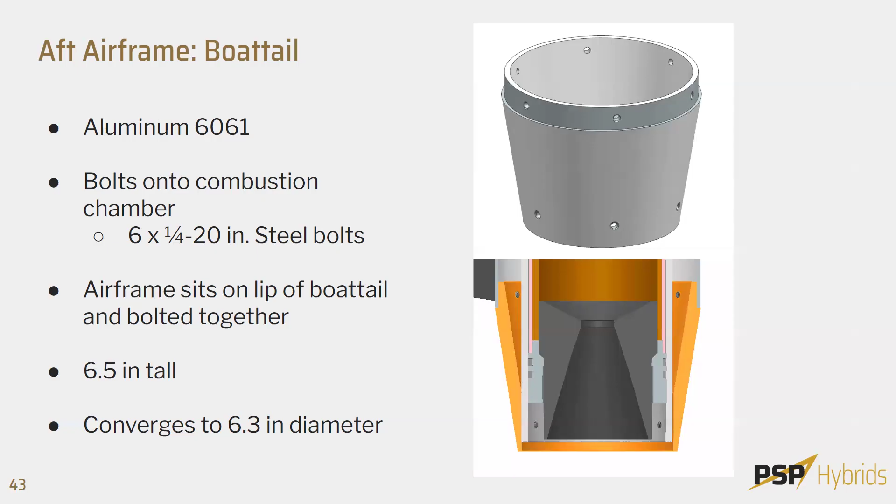Okay, good. Hey, Jasper. So I'm going to talk about our ground support equipment.

There you go. Why did it go to the bottom? I'm sorry.

So the ground support equipment of Nostromo, Spectre is going to be using—we're going to be loading from 2 nitrous K bottles, a helium bottle, and using 100 psi nitrogen as our pressurant. We're going to be boosting the flow of our nitrous into the flight tank using an air-driven liquid pump with a 25-to-1 pressure ratio.

The control of fill of the nitrous is going to be controlled by our nitrous fill valve, and the control of helium fill is going to be controlled by the helium fill valve. We have a dump valve integrated into the ground support equipment that can dump both the helium and nitrous lines, and if the quick disconnect is still connected to the vehicle, it can also dump the flight tank.

We have installed 1500 psi relief valves on the helium and nitrous lines, and we will be regulating the tank pressure supercharge using the regulator that's on the helium line. This will be set to 1000 psi. And like I said, we'll be using 100 psi nitrogen as our pneumatic pressurant.

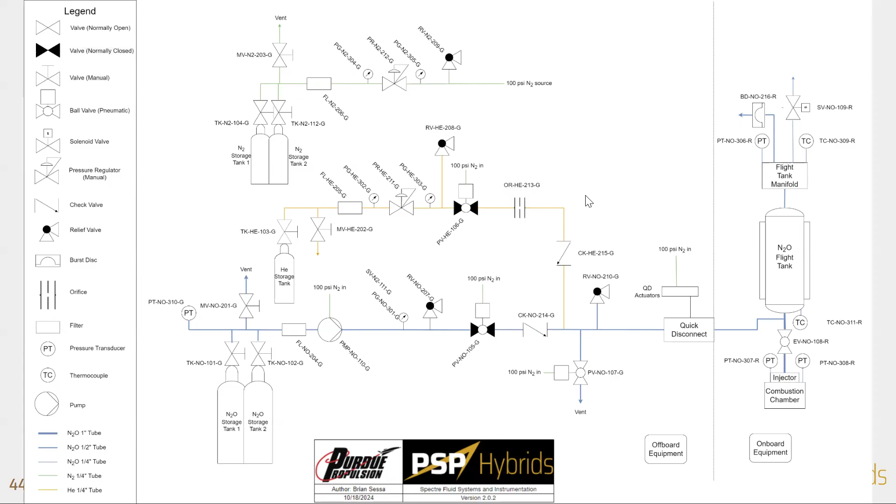what we did in the past is a Raspberry Pi. There's a company called Measurement Computing that sold a hat for the Pi, and it was able to take like 3 or 4 PTs, and then it had 3 or 4 slots for thermocouples with a conditioner on it. So all we did was splice the wires from the PTs, had one go outboard to the GSE, the other go to the Pi, and I just record. That's all I did was record.

Okay, yeah, we'll definitely look into that then. If we think that we can do flight data acquisition, we will. It just wasn't a requirement for the flight data acquisition, if the PTs are already on there. Yep, $50 and you can have data.

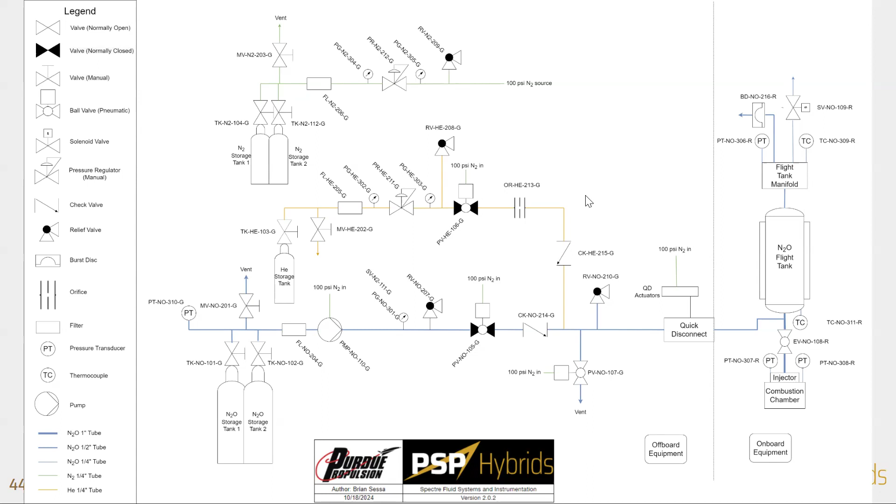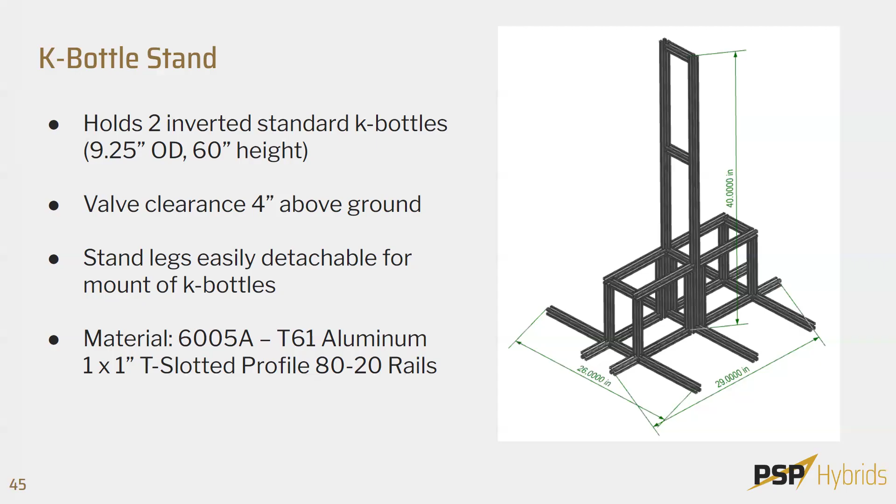So the way we would load these bottles is by taking off one side of the legs, which should be easy to take off. We would then put this system on its side and then lower the bottles into their respective positions, chain and strap them, and then raise the whole system up again and reattach the legs.

Yeah, that's good. Questions first. Are there any questions yet, before we go into potential tipping issues?

How much does it weigh, each or the stand itself? I mean, when you go to stand this up, how much weight's gonna have to be lifted? Each bottle should be around 150 pounds each. 150 pounds, okay, yeah, so in total? For each one, 150 pounds each.

So you guys wanted to lift 300 pounds? We'll have multiple people on it. So we plan on probably attaching a rope or maybe even using a ratchet strap that will be around the two, sort of pull as well as lift. And because you take the legs off, the moment's a lot lower. The moment ideally will be lower because it'll be close to the center. But you'll have some leverage on it, you won't need to physically lift it up into the air.

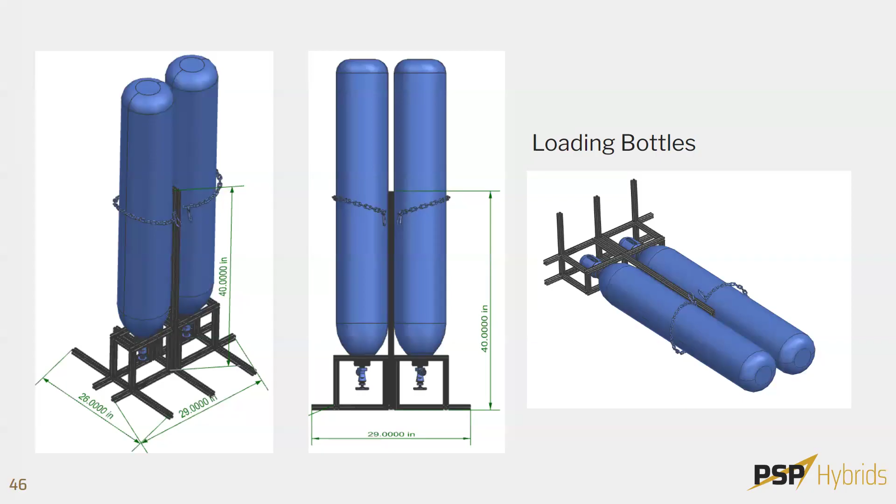So cool. And you might want to triangulate that base a little bit, and just test the crap out of it.

With it being orderable, we can easily get it in and start assembling it, testing to see how it is structurally and making sure nothing is wrong with it, yes, with the caps on.

Going into tipping issues and potential worries, not with Zucrow testing, but with Dairy Farm or the FAR launch, we're concerned about if the stand isn't actually perfectly level. We don't have great ways to mitigate it, but just to make sure for this current design, with any extra things, keeping it perfectly flat at those potential places there could be tipping issues.

So we decided to see how much force on the top part, which would be the worst case scenario, would result in it tipping over. We wanted it to be able to withstand over 200 pounds of force at the top, and we found that at 8 degrees this would be perfectly fine, able to withstand 200 pounds given the current leg length.

But on its own, it'll tip at 14 degrees. And these are just some other potential scenarios, discussing potential issues with tipping and potential mitigation solutions we thought of.

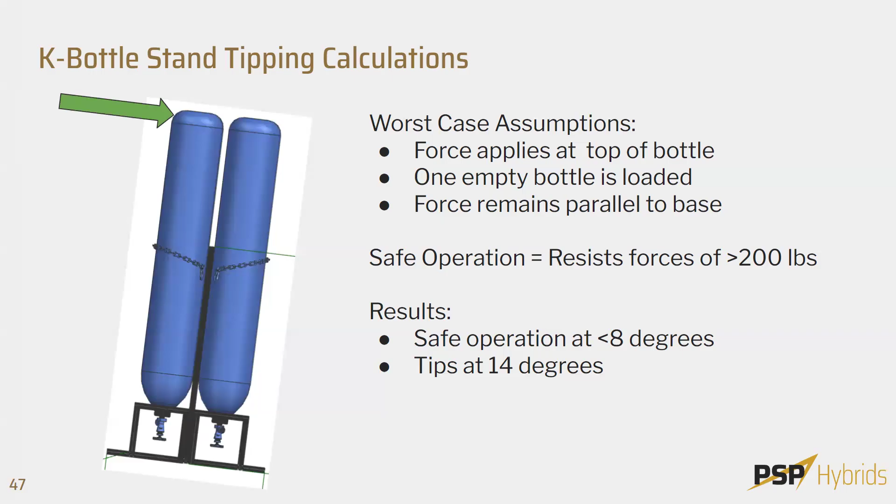Hi everybody, my name is Nick. I'm the data and control specialist for the prop team. Currently this is our DAQ, housed in this black box container.

The way we reconnect it to the ground systems cart is with these wire connectors here. It's a simple plug and play, with secure screw connections so they shouldn't come undone. The hardware we're using, our controller, is a USB 6343. We have a backup Myrio just in case the 6343 doesn't work. We have signal conditioners for our TCs, our PTs, and our load cells.

The software we're planning on using for the USB is Zucrow's LabVIEW. The Myrio has its own LabVIEW, but I'd like to use Zucrow's LabVIEW because it's a little more user-friendly compared to the Myrio's.

As you can see, it's a big black box. We're planning on painting it white eventually. As far as a cooling solution goes, we have two Noctua fans, one pushing air in and the other pushing air out. These fans have enough CFM to completely cool anything within the box. There are also air conditioning filters, so when we go out to the Mojave, no sand will ever get into this box.

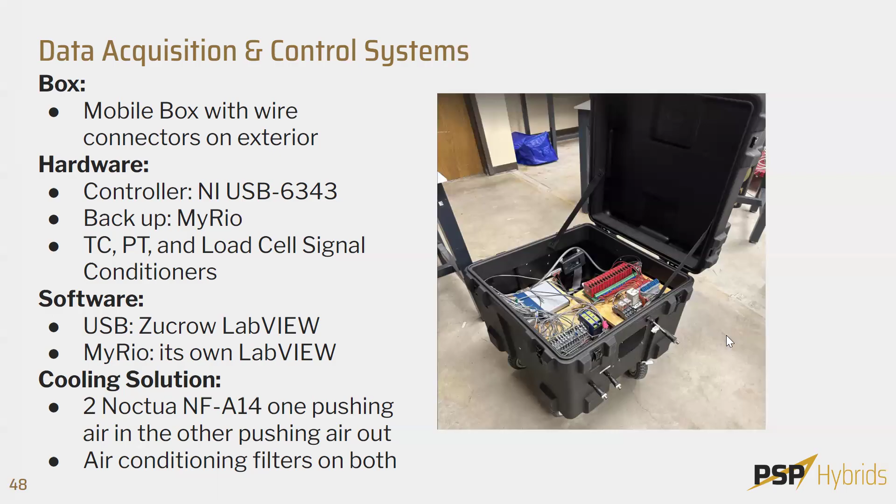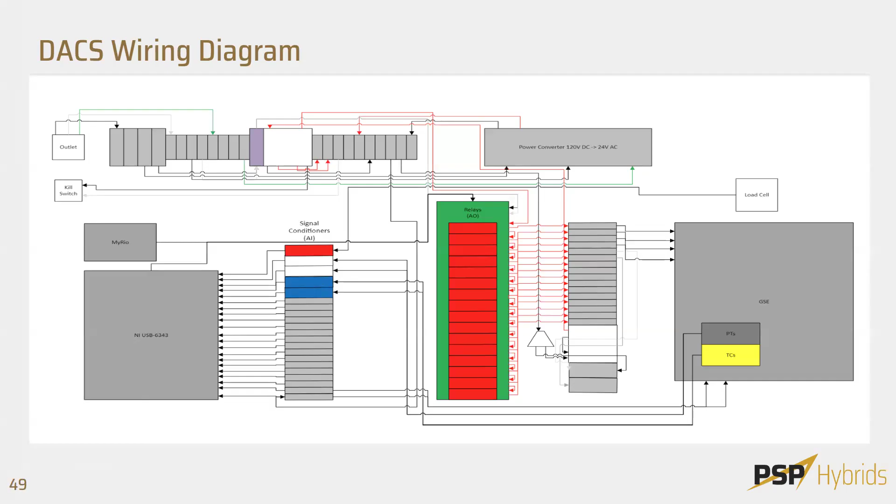So we're gonna move into general questions now, if you had any other specific questions about any other component. But that was our presentation.

That's very nice. The design of your fuel grain and the conditions for your fuel grain. Yep, you need to come up with how to vet that design.

Given that you're trying to push the envelope, we'll look at first seeing how we can tune our startup thrust. And if we're going to be expanding the fuel grain itself, the liner will become a little wider. We can consider opening up the port a little bit to lower the mass flux in that region, and we can consider lowering our initial oxidizer flow rate. But we'll play around with the simulations to see what's best.

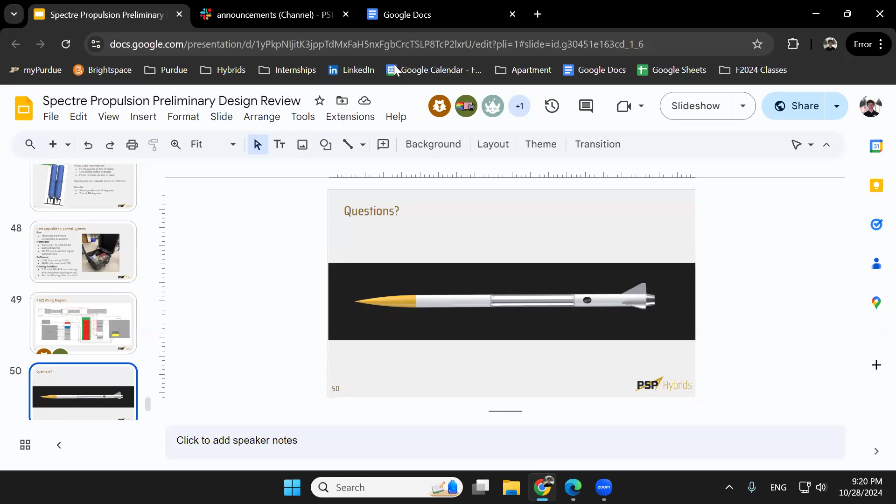But thank you guys very much for allocating design time and still making sure things worked out. Matt, I know prop isn't really your thing, but we appreciate your time coming down here. We know it's not your interest field, but it was awesome seeing you.

Blake and Sarah, thank you for coming by, it's good seeing you guys. And Caleb, of course, as always. No problem, best of luck.

I might give you some more feedback later, but I think that's all I got for tonight. Great, thanks so much. Great job, guys, it's been great so far from what I've seen. This is really, really good progress building off what Caleb was able to accomplish at the end of last year. Thanks, Sarah.

I guess final thought, I can't stress this enough: holy crap, you guys are way ahead of where Havoc was when I was on the team. It's like night and day. Anyway, glad to see you're in good shape. That warms my heart. Thank you, Matt.